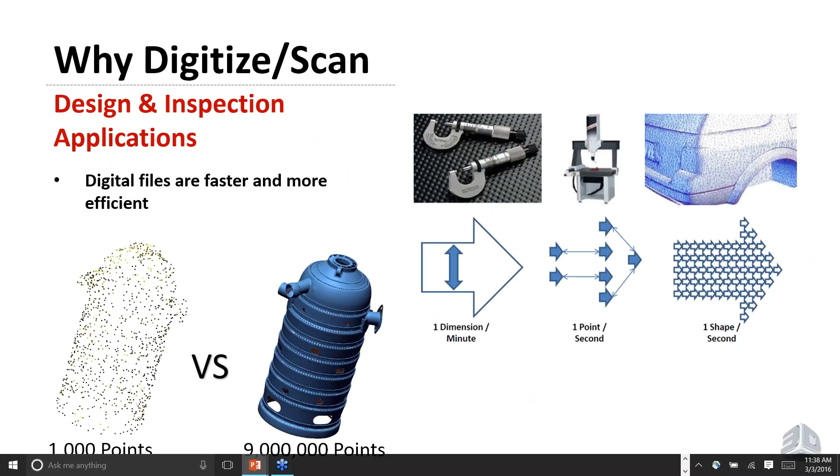Speaking about today is 3D scanning. So the big question is why do it? What makes it so great? The answer is pretty straightforward. Scanning is simply much faster and more efficient than traditional tools. You can collect millions of points of data within seconds for a better and more accurate representation of the 3D

geometry. Not only is it more efficient in collecting data, it makes the next step of converting or analyzing the data that much faster. Now that you have millions of points of information, you can bring that data into Design X or Control and create automated inspection reports or use feature wizards to tackle hard-to-create geometry.

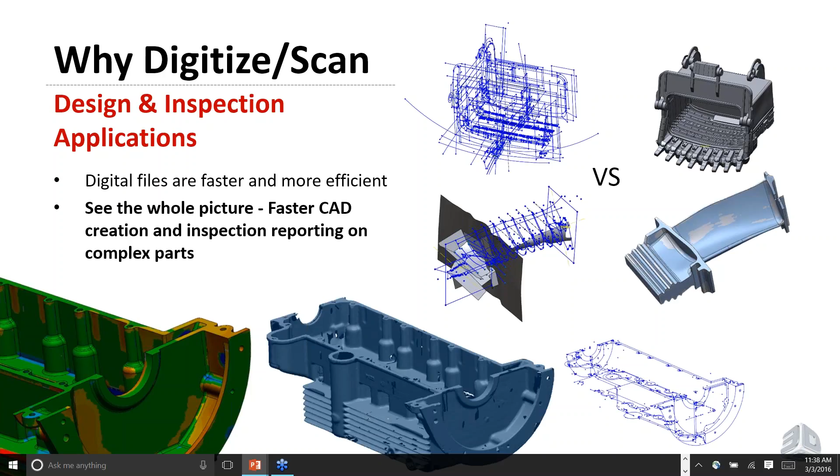Very similar to 3D printing, this technology really shines when dealing with complex design. An organic surface or an intricate detail on a part can easily be captured and recreated with scanner and software, where a set of calipers or CMM would struggle. And there are a lot of applications for improving or remanufacturing of a design that has no CAD files available.

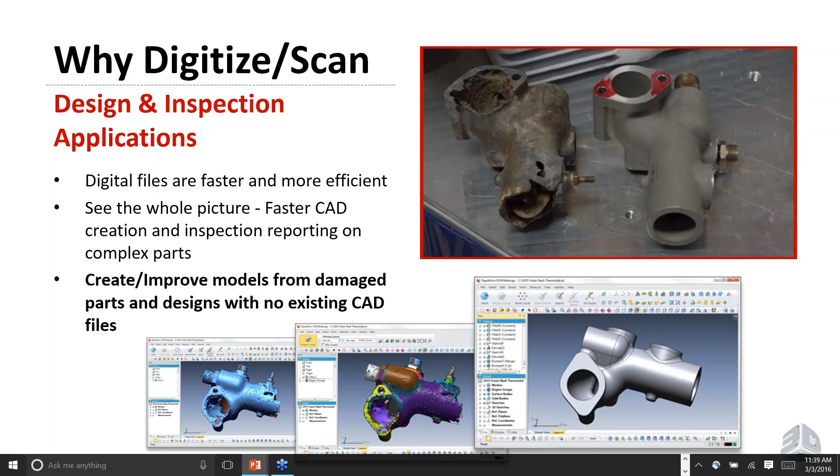This thermostat housing for one of Jay Leno's vintage cars that we did last year is a perfect example. He needed to replace and remanufacture this damaged part, but a 3D model just didn't exist. With 3D scanning, he was able to quickly digitize the part, allowing for quicker CAD recreation. And this is also great for his newer cars as well.

He scanned the body panel of his hand-built jet-powered car, the EcoJet, and used our software to design a vent that perfectly fits in the space. We printed out a working prototype. Because of the speed and accuracy of scanning and the strength of SLS 3D printing, he was able to have the parts ready within weeks compared to months. And this is the power of the digital thread.

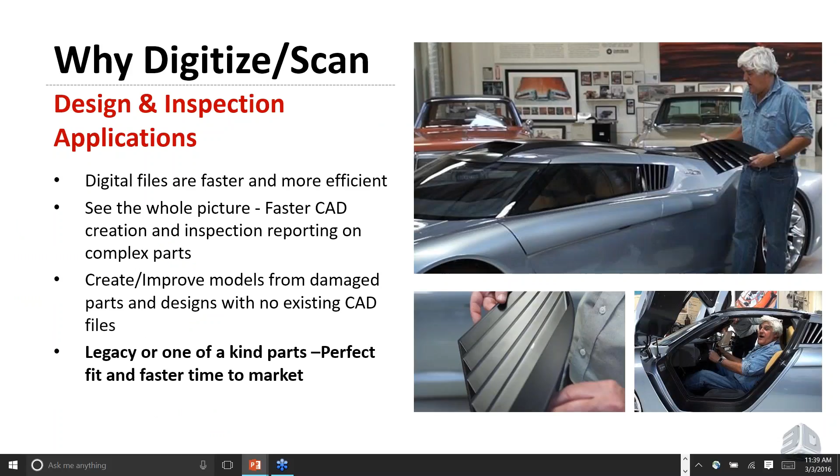So there are so many useful applications for scanning, whether it's a large-scale project that is too big and time-consuming to gather the data by hand, or an intricate detail or artistic design that is almost impossible to replicate. Imagine trying to measure a plant site or an airplane by hand.

Or maybe you want that perfect fit for a phone case, but don't have the dimensions or CAD files from the original manufacturer. You can quickly scan the phone to lock all of its dimensions and build a case that fits perfectly around the body. Scanning makes this all possible and provides the designer a more accurate approach and faster time to market.

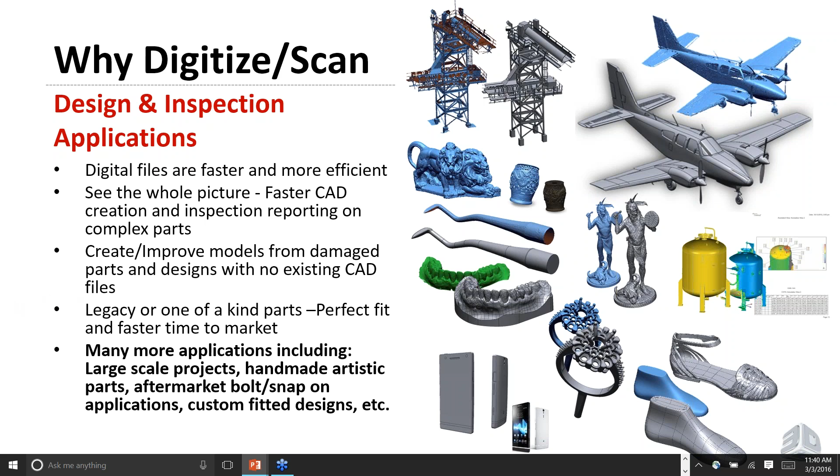So the scanners that we manufacture and sell are the Capture and the Capture Mini. There are a ton of different scanner technologies out there to choose from, and what's really great about the Capture is its accuracy and speed. It gathers roughly 1 million points per scan, and those scans are typically gathered in a couple of seconds.

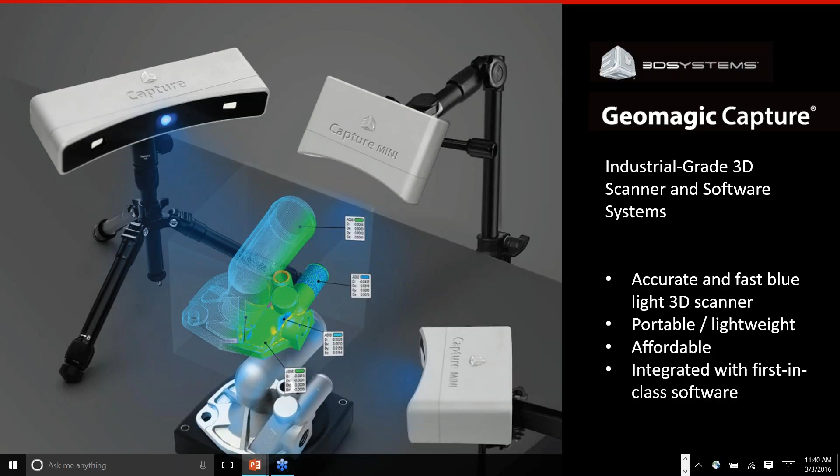It's portable and lightweight, so it makes it easy to carry around or have on your desktop, and it's affordable. It's one of the best scanners you can get on the market for the money. And it seamlessly integrates with all of our software packages. So that includes Design X, Control, and some of the other products like Freeform and Wrap.

So speaking of software, we're talking a lot about the scanning, but what do you do with the data once you capture it? There is a big misconception out there that you can go straight from a scan file to a CAD or CAM software, or that you can immediately print that 3D file, and that's not true. You'll need software to prep that data and interpret it. That is where Geomagic software excels. We're the industry leader when it comes to scan processing.

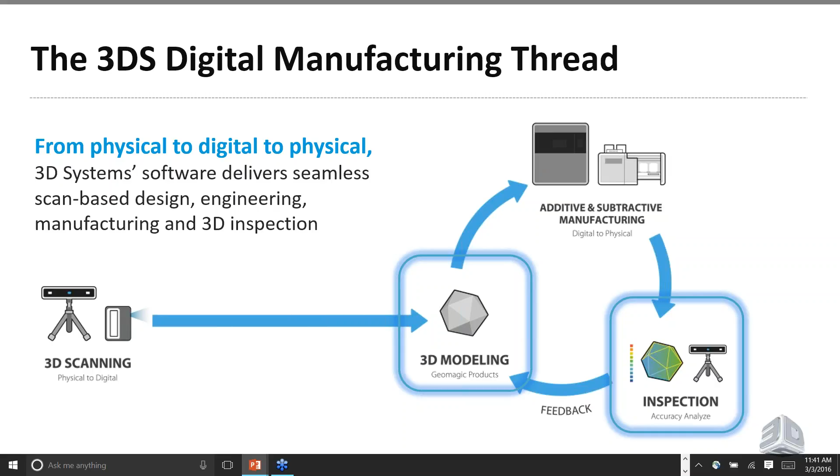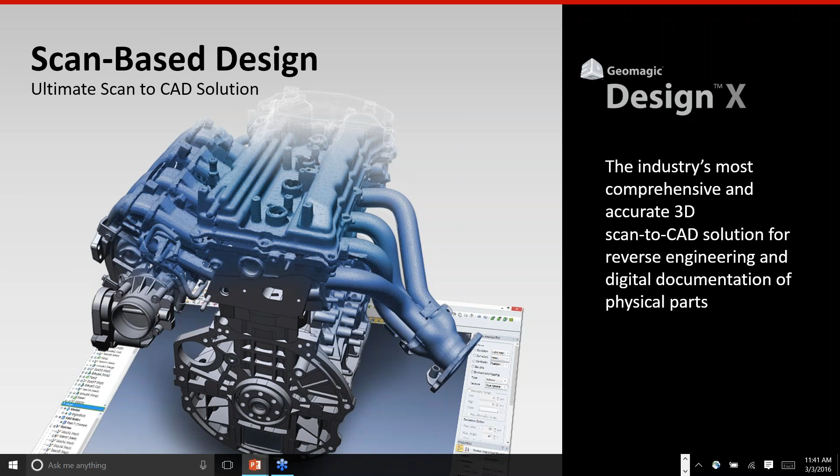The software leading that charge is Geomagic Design X. This is the ultimate scan-based design solution, and it bridges the gap between scanner technology and CAD/CAM software. What sets Design X apart from any other software solution out on the market, it's the fastest. There's no faster way of creating a CAD file from scan data available.

It can create native tree history models using its one-of-a-kind LiveTransfer feature, allowing for much faster design changes and faster time to market. And you can create neutral CAD formats that any CAD system can read. It integrates with our very own Capture, but also has plugins for direct scanning for all the major scanning OEMs, and works with any type of scan part. And that includes long-range scan data and something as small as jewelry design.

It also has best-in-class mesh editing tools with parametric CAD built in. So no more using 2 programs to prep the mesh and model. You can model right over the scan data, making the process more accurate and efficient. Automated surfacing tools to create CAD models from organic shapes are included, and easy to use for existing CAD designers because it has CAD built in. So it's a very intuitive workflow. And it works with incomplete or bad scan data. So things that are impossible, you can make possible.

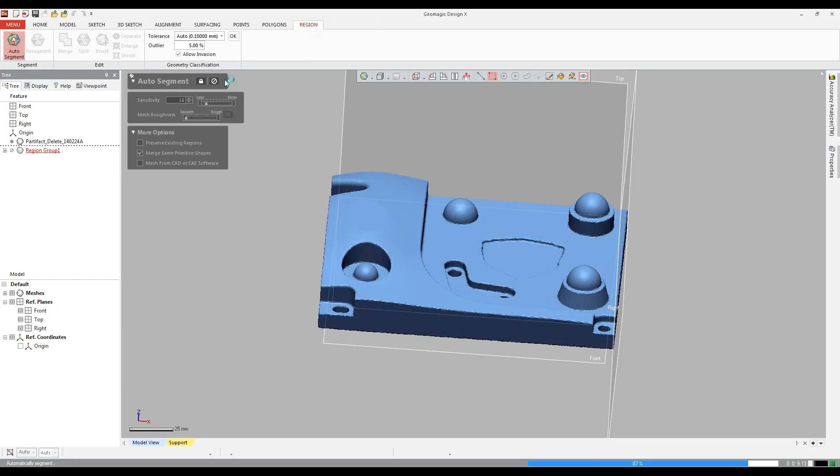The first thing I'm going to do when this model comes in is apply what we call region groups. If I build a model in design software from scratch, there's intelligence and perfection built into that design process. Of course, when I bring in scan data directly from the scanner, that information does not have that intelligence built into it. So our region groups analyzes the curvature in the scan data and breaks it apart into segments.

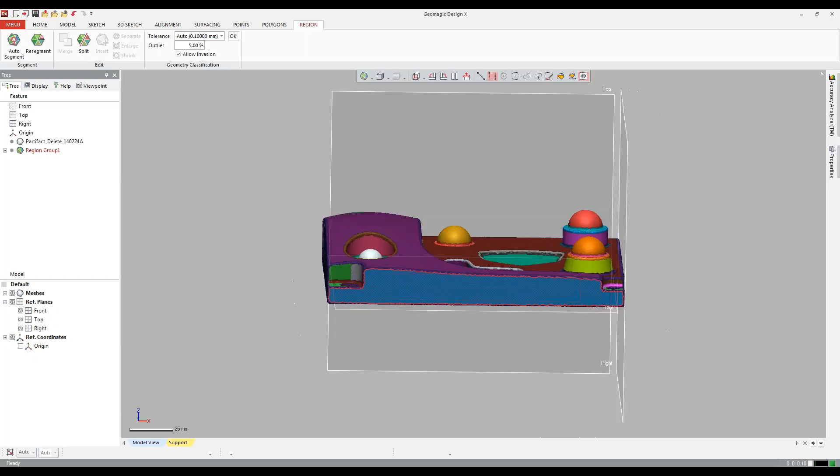We can use those region groups to help in the data alignment and reverse engineering process. Design X follows a workflow very similar to CAD software, so if you have CAD experience, it's easy to pick up. We create 2D sketches and extrude those sketches into 3D geometry.

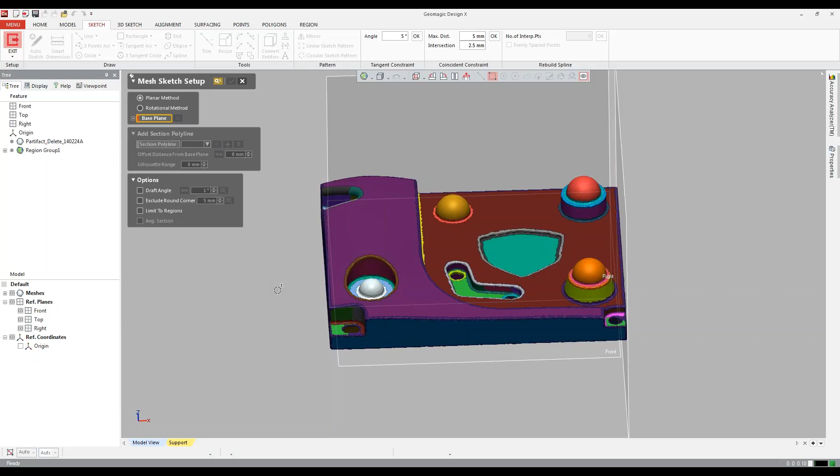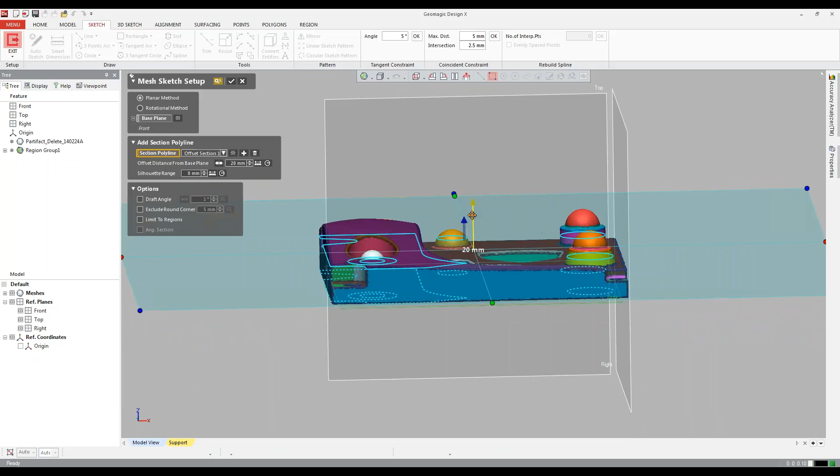So I'll create my 2D sketch, and I'll take a slice of the model. You can see the solid blue line here is the sectional slice I'm taking, and that dotted blue line is the projection of that slice onto my sketching plane. I'll move this slice into a region of the part that best represents the sketch I'm trying to create. So to start this part, I would draw a rectangle and extrude that into 3D geometry, then add smaller features. I'll move this sectional slice to a region of the part that gives me that rectangle.

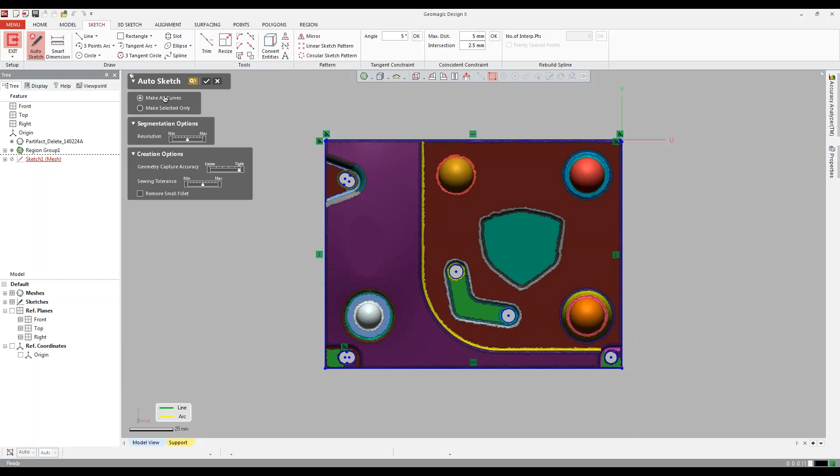Then to create my sketch, I'll use our auto sketching utility. This is going to find primarily lines and arcs inside of that cross-section I created and add sketch figures to them. Intelligence is built into that sketch so you can see there are horizontal, vertical constraints applied. Tangency is automatically applied. If I have a line approximately tangent to an arc, it will detect that and apply those intelligent constraints automatically.

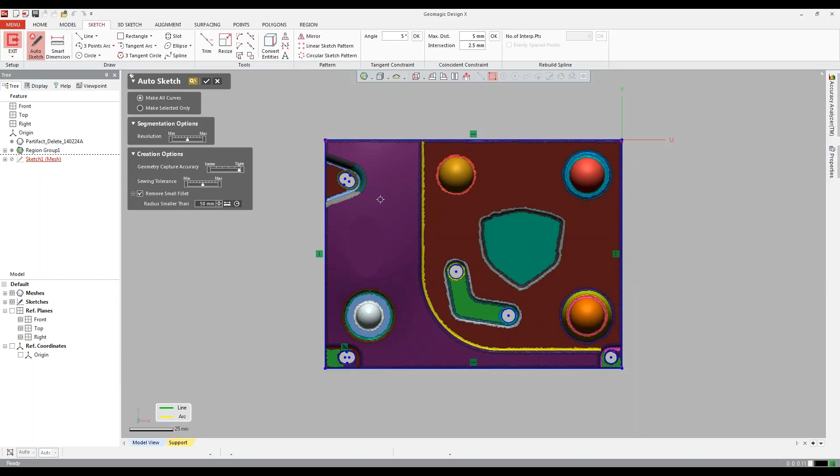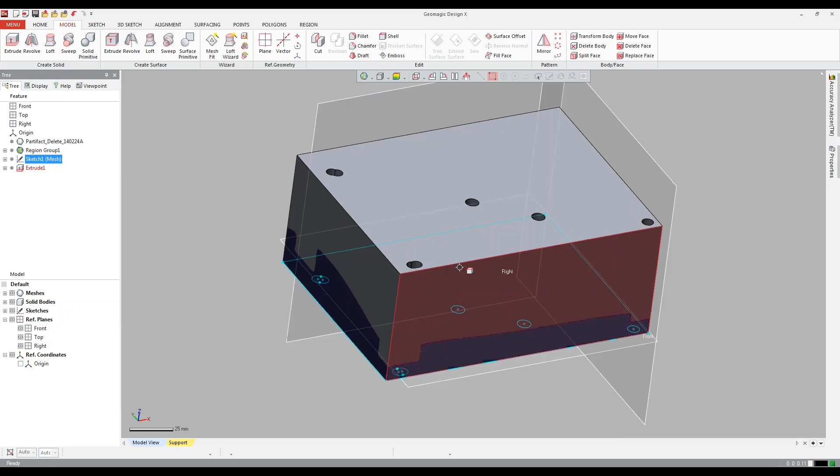Once my sketch is created, I'll extrude that into 3D geometry, just like I would in CAD. So this creates a solid body. This is the format of a model that I would send out for production. And to continue this process, we'll simply add more features using that scan data.

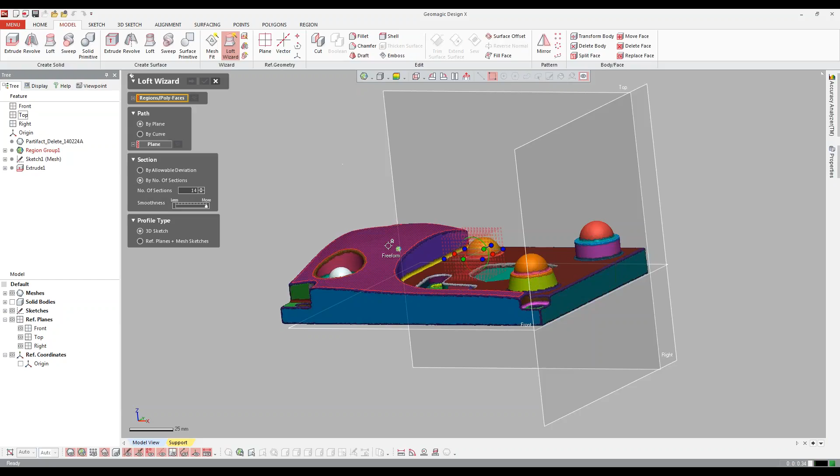So I'll hide that solid model that I generated, and I'll create a surface to represent this freeform face. If I were going to create a freeform face like this in most design software, I would do that by creating a bunch of sectional slices and then lofting those together. With this tool, I'm effectively doing the same thing, just going in the opposite direction. The geometry itself is already defined by the scan data, and I just need to recreate those sectional slices.

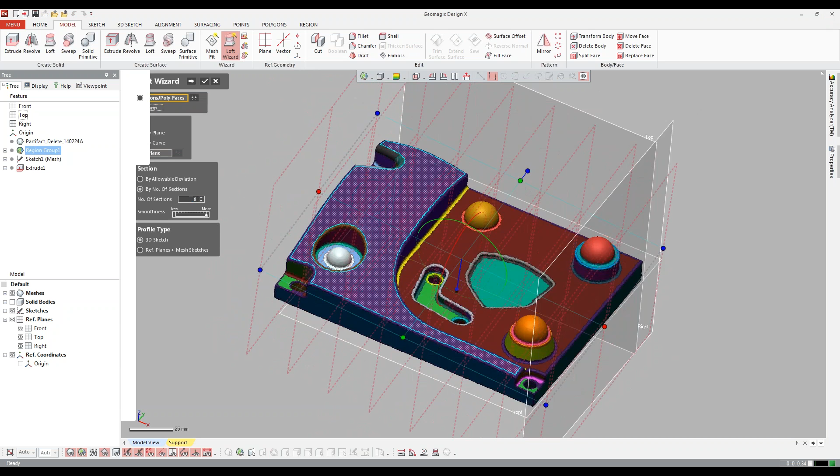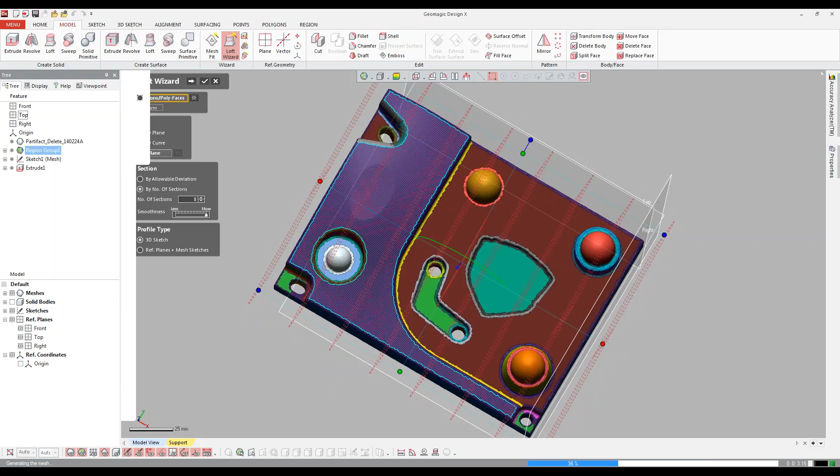So I can change the number of sections that I'm creating. These pink lines represent the sectional slices. Or I can tell it to use the least number of sections necessary to achieve a certain deviation to the scan data. When I go to the next step, a preview for that surface is shown, along with the sectional slices that will be used in the loft to generate this surface.

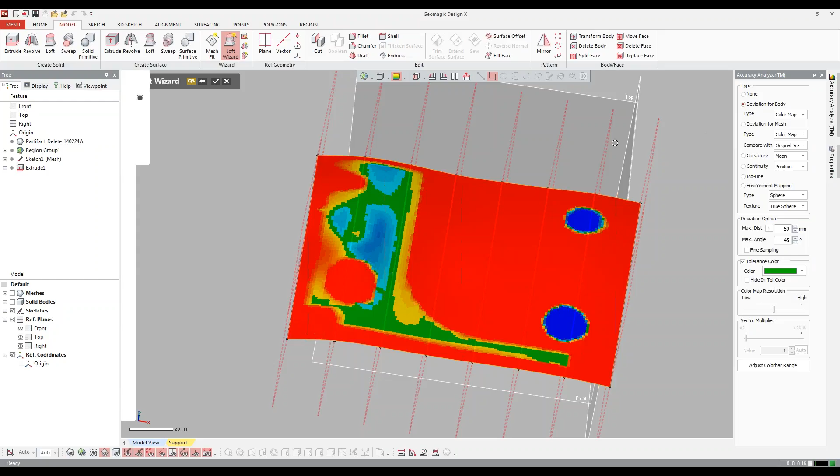Any features that I create in Design X, I can check the deviation for on the fly. So even before I confirm this feature, I can check to see that the feature actually fits the part. And of course, if I want to make any changes, I can add additional sections to areas of high curvature to get closer to the scan data.

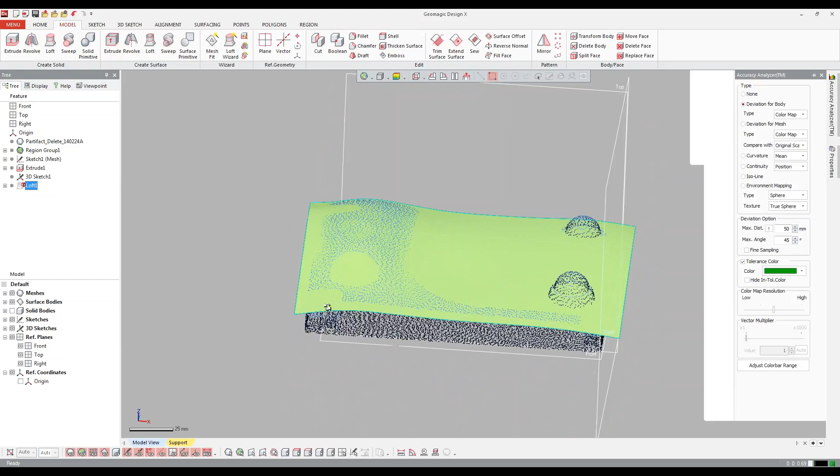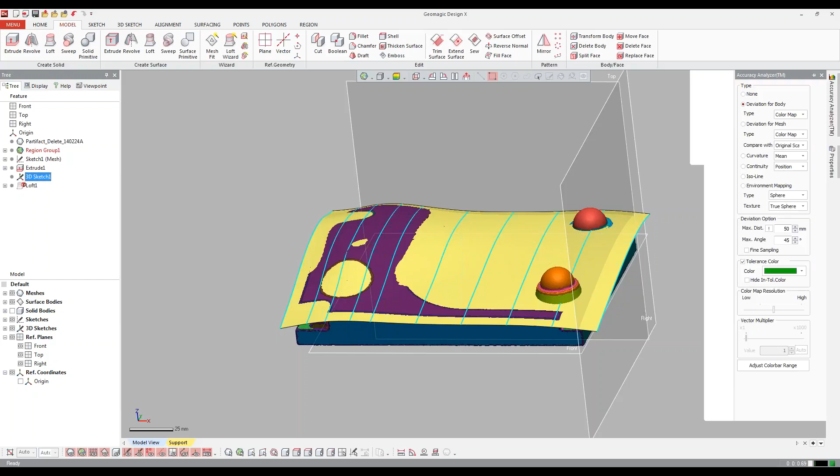When I say OK, a lofted surface is added to my design tree, along with those sectional slices. To create something like this from scratch using any other process outside of 3D scanning would take a very long time. I'd have to measure quite a few points to reconstruct the surface.

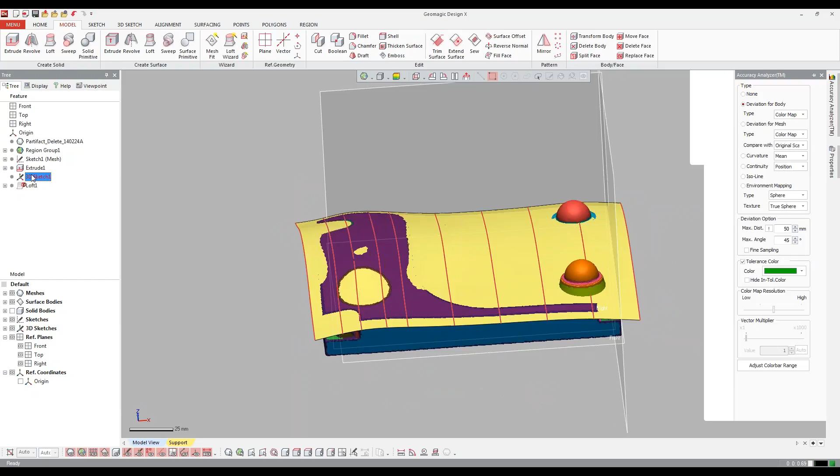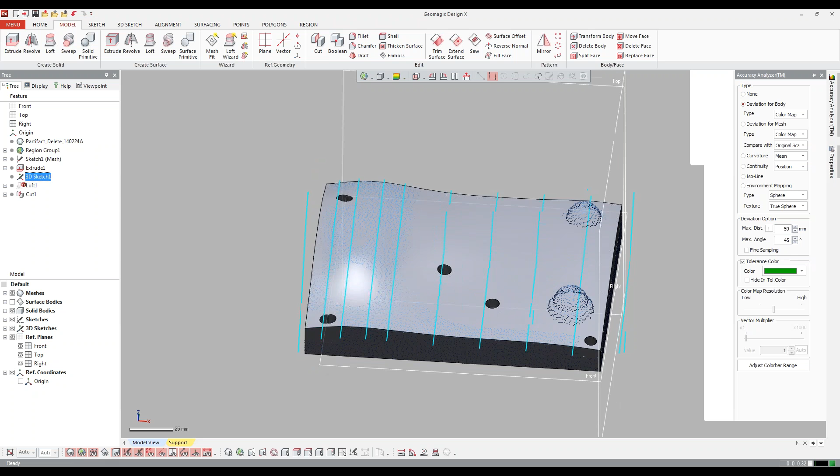But using the scanning process, I'm able to do that very quickly in a format that is parametric. Not only do I have a surface that fits the scan data, but it's history-based and tied to these sketches. If I need to make modifications, I can edit that sketch, adjust these control curves, and that surface will update automatically. So now I'll use that surface to cut the solid body I created earlier, giving it that same freeform curvature.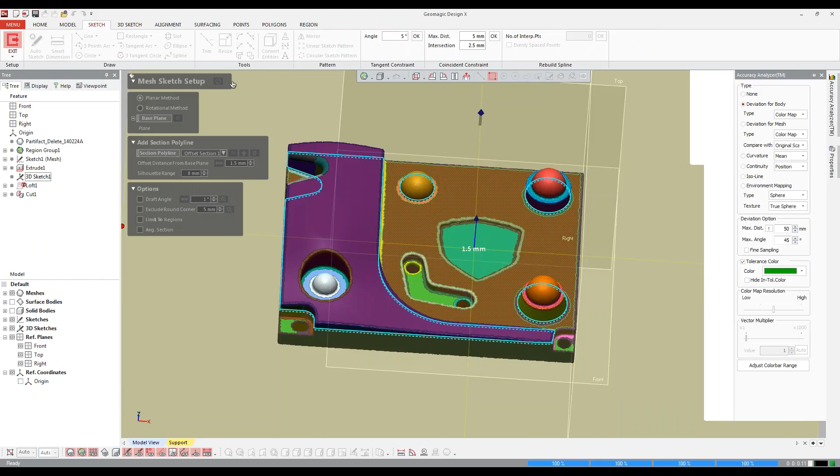I'll hide the solid body again. We'll do one more of those mesh sketches. This time I'll create this large inside cut. I'll move that sectional slice to an area that gives me a good representation of that wall, then auto sketch that wall. Since I'm creating this for CAD, if I want solid geometry, I need a closed sketch, so I'll add a few extra figures there.

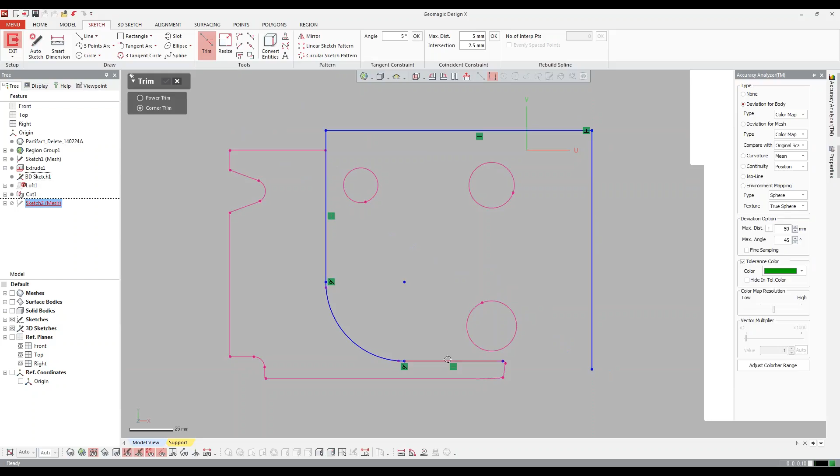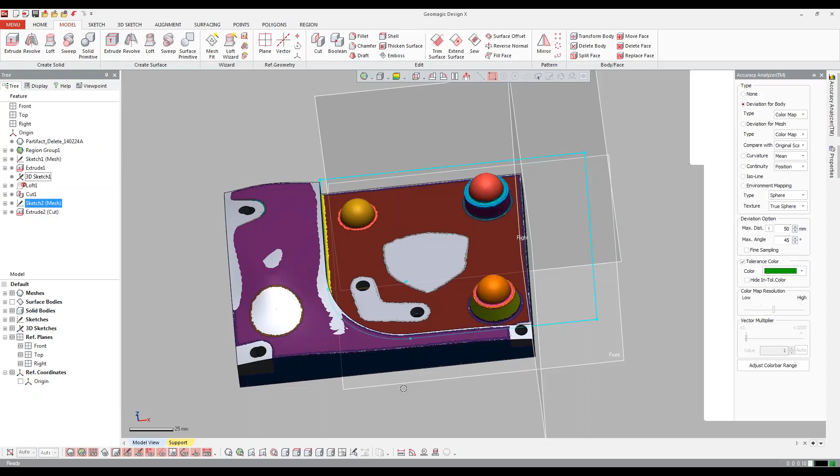Corner trim, and cut that away from my solid body. So that represents the manual process for creating features in Design X.

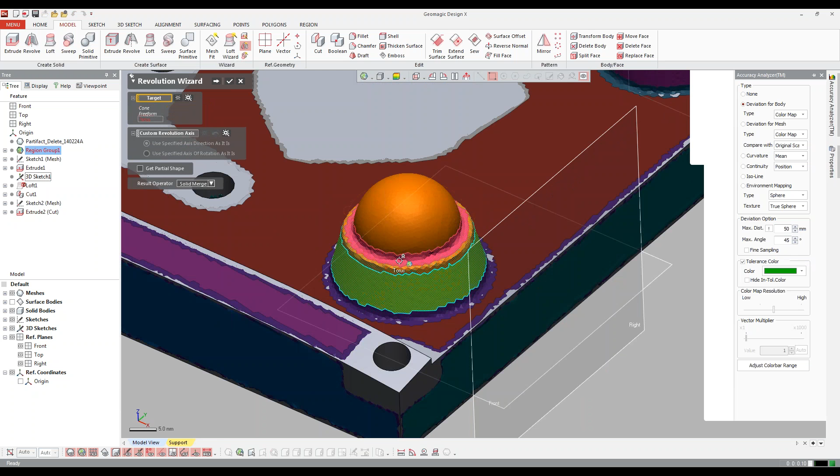But we have tools that automate that process even further. We call those our modeling wizards, and I'll start with some of these revolutions. To create these revolutions in CAD, I would need to create an axis of revolution, create a plane along that axis, then create a sketch on that plane and revolve it around that axis. Using these wizards, I simply select the scan data that represents the feature I'm trying to create.

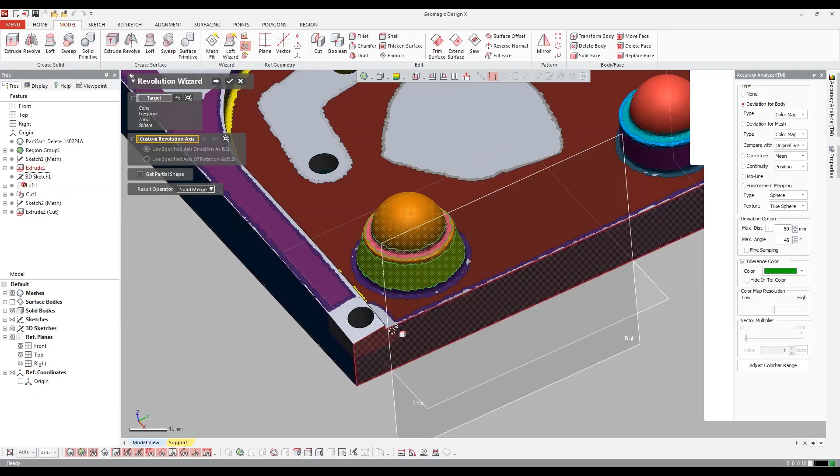Of course, scan data is never perfect, parts are never perfect, and what we're trying to accomplish is to get back to the original design intent for this part. So I can add user intelligence throughout this process to override the data available to me and add intelligent constraints. In this example, if I best fit an axis into this, I might find that it's slightly off angle, so I can tell it that I know the axis for that revolution is vertical.

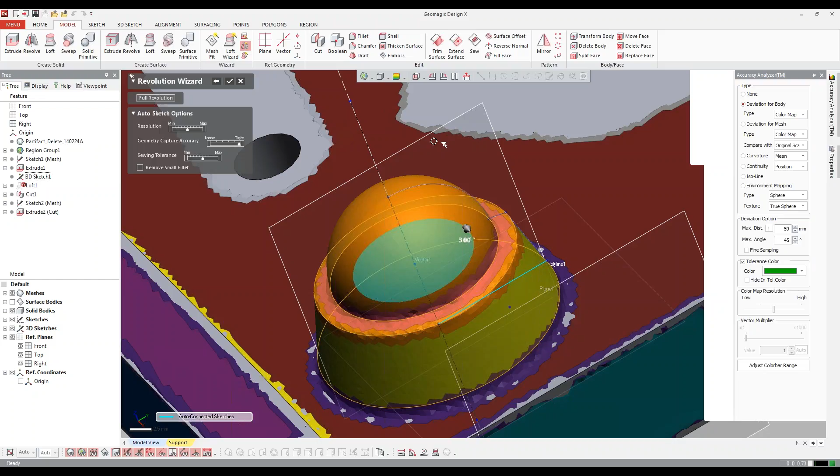When I go to the next step, you can see a handful of things just happened: that axis was fit in, the plane was created, the sketch was generated, and that sketch was revolved around that axis. So even though I was able to create this feature with a couple of clicks, it has the same attributes as a feature I would generate from scratch in CAD.

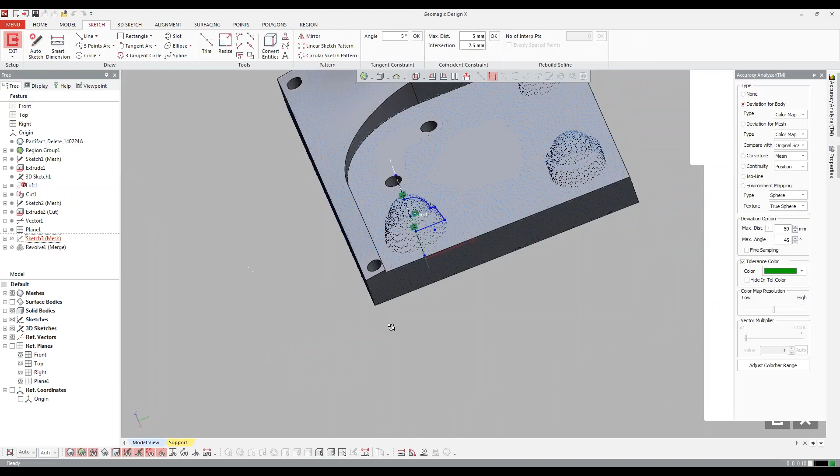So if I need to make modifications, I can simply edit that sketch, and when I leave the sketch, the model recomputes with those changes. Using that process, I'm able to very quickly generate history-based features.

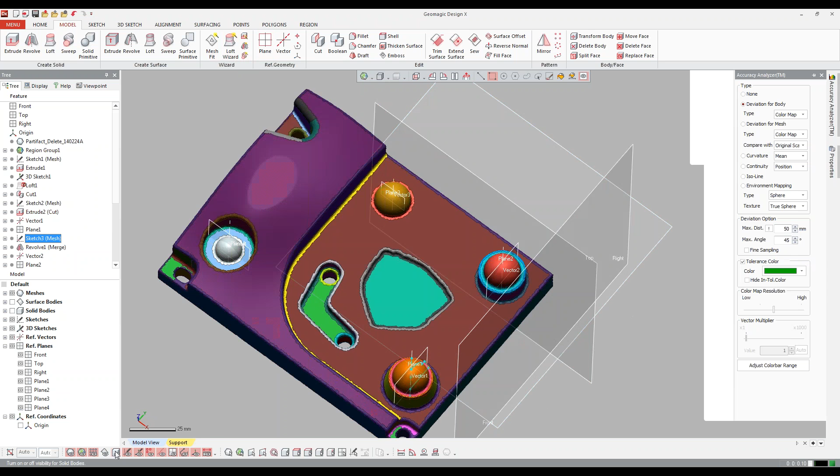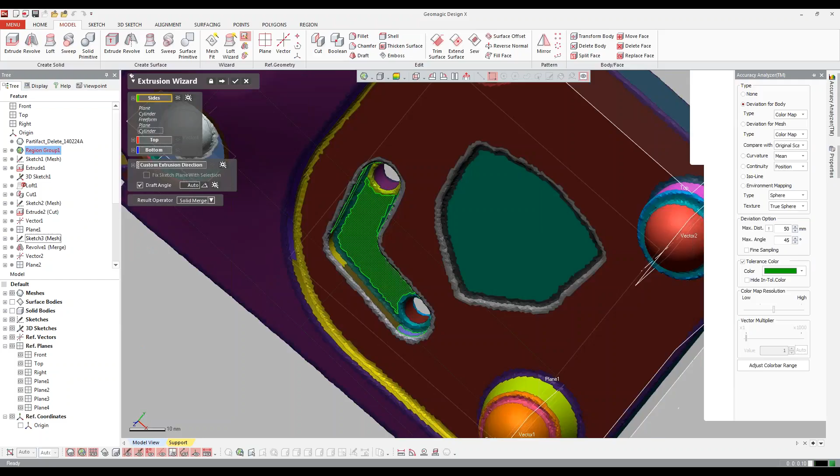I'll hide that scan data and show the solid body that I've built. We have that same tool for standard extrusions as well. So I select the sides of the extrusion, the bottom of the extrusion, and tell it that this is going to be a cut, and that feature is generated.

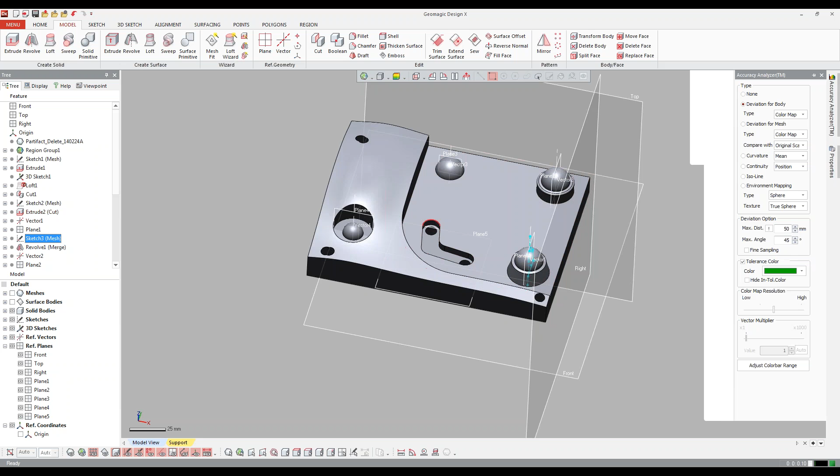So using these wizards, I'm able to create a part that would take 20 to 30 minutes to design from scratch in CAD, and build that same part with the same CAD intelligence in a matter of minutes.

Once this process is complete, I can transfer this model over to my CAD software using a process we call LiveTransfer. What LiveTransfer does is use the CAD software's API to rebuild all of the intelligence we've built around this part directly inside the CAD software. So all of my reference geometry, my planes and axes, all of my sketches, all of my constraints, all of that transfers directly into the CAD software. To demonstrate that, I'll use SolidWorks.

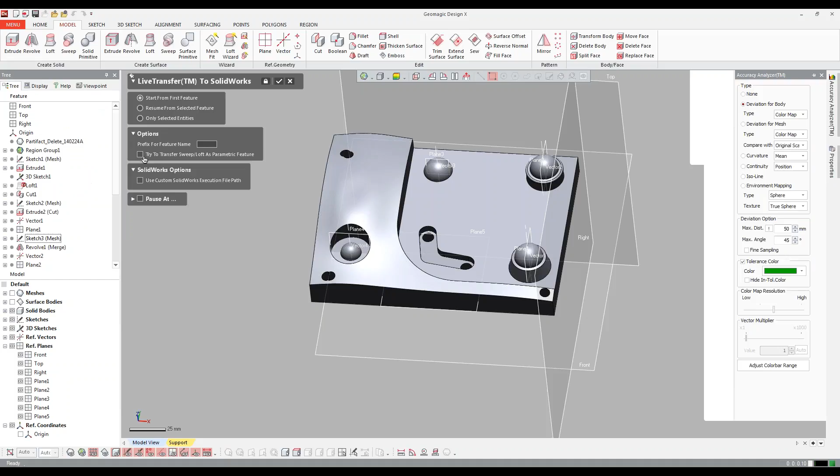There's a couple advantages to this process. One, the more obvious advantage is the one I just mentioned: this entire design history is rebuilt directly inside my CAD software, so if changes need to be made downstream, it's very easy to do so.

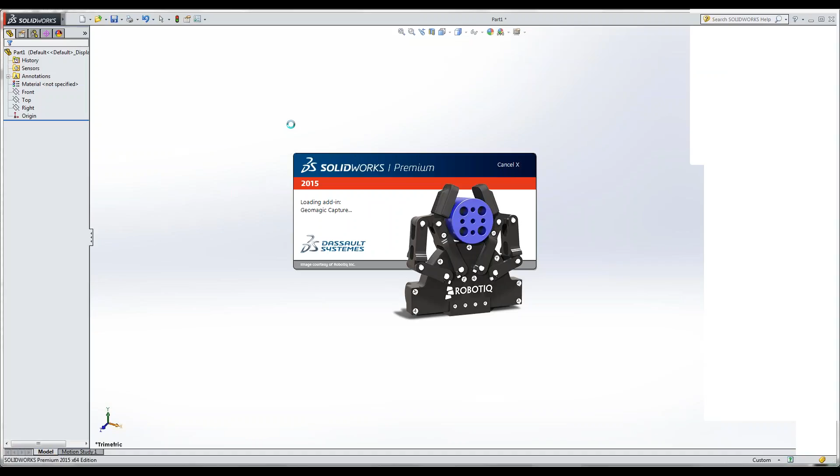I can edit those sketches and recompute those features just as if I had created that model from scratch inside my CAD software. The other advantage is that we are circumventing any file translation in this process. The common CAD formats used to transfer solid models between CAD systems are notorious for having problems.

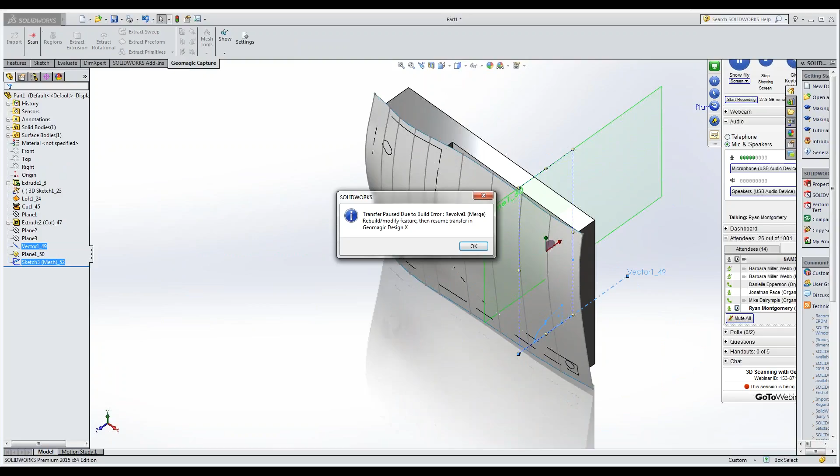And we're able to get around those CAD formats by rebuilding the model directly inside the CAD software. If I do have problems, it's tied to an individual feature. So we can see here we have an error. When that occurs, it pauses the LiveTransfer process in Design X, so I can go back and edit these features, and then resume that LiveTransfer process where I left off.

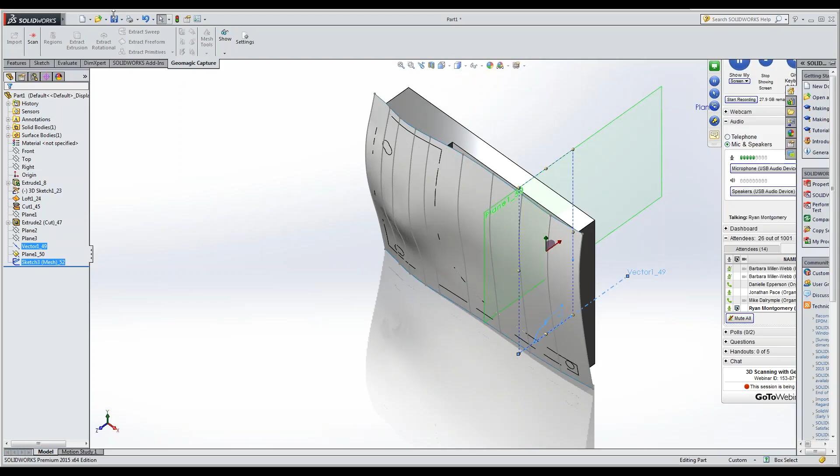Once I'm done, I simply hit Save in my CAD software, and I can save this file as a native part.

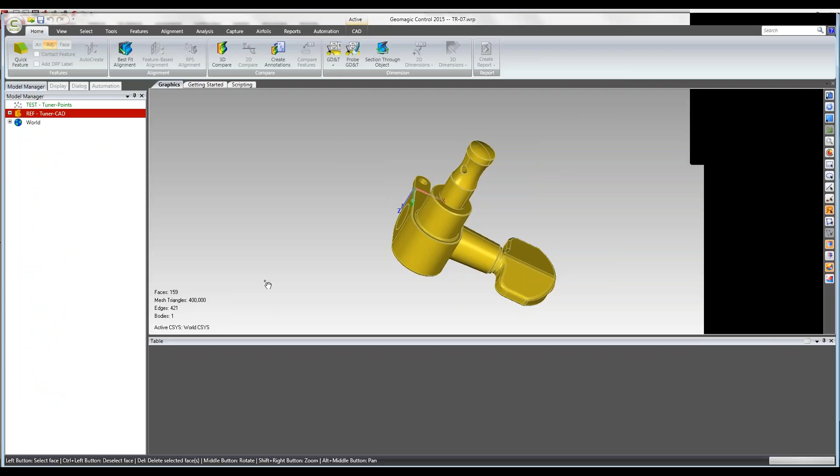So that's Geomagic Design X, our reverse engineering solution. Now I will show Geomagic Control, which is our inspection software. In Geomagic Control, we take scan data and compare it to the original CAD file that goes along with that particular part.

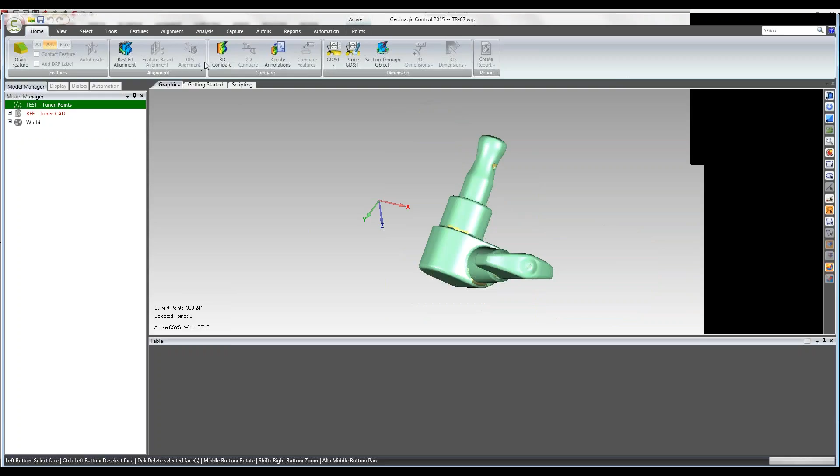So I have the CAD file imported here, I have the scan data imported here, and the first step is to align those together in the same position. We have a number of different ways that we can do that. The easiest is our best fit alignment.

That just looks at the geometry between the two components and tries to balance out the deviation across the part. So as soon as this process completes, you'll see the scan data jumps to the same position as the CAD model.

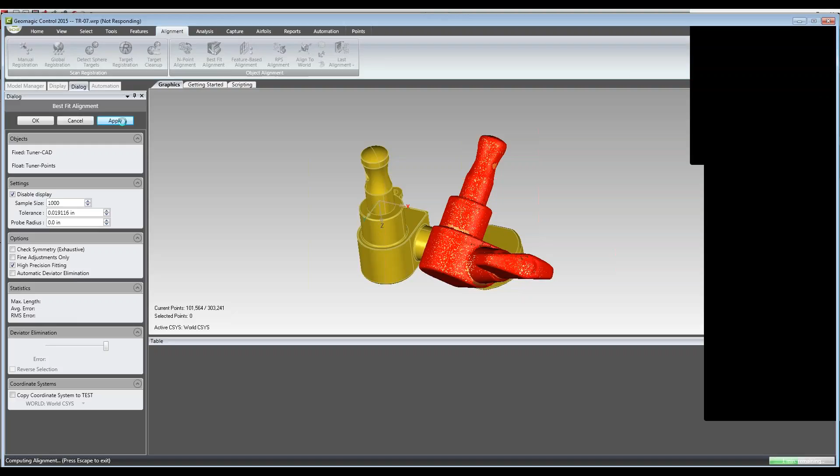Of course, we can also generate features on this model for datum alignment. Once that scan data is in position, typically the first thing we'll do in this process is a 3D comparison between the two.

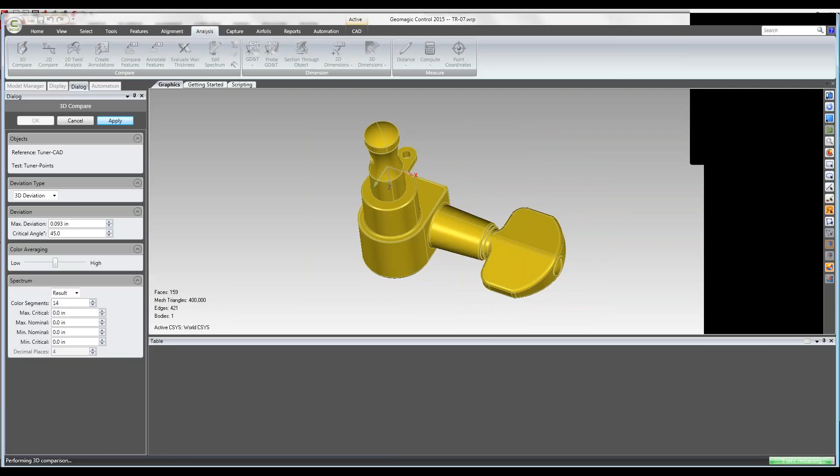This shows the deviation between the manufactured part and the original design intent.

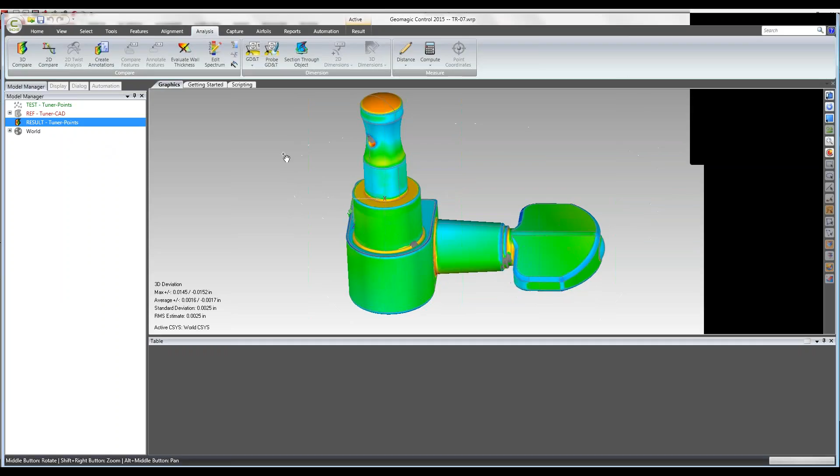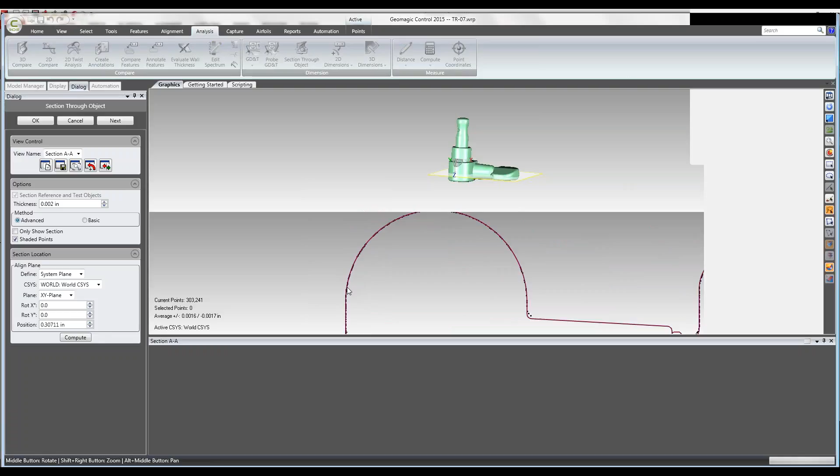Of course, we can take measurements as well, so I'll create a 2D section here. In my 2D section, you can see that this purple line represents the CAD data. Those black dots represent the scan data.

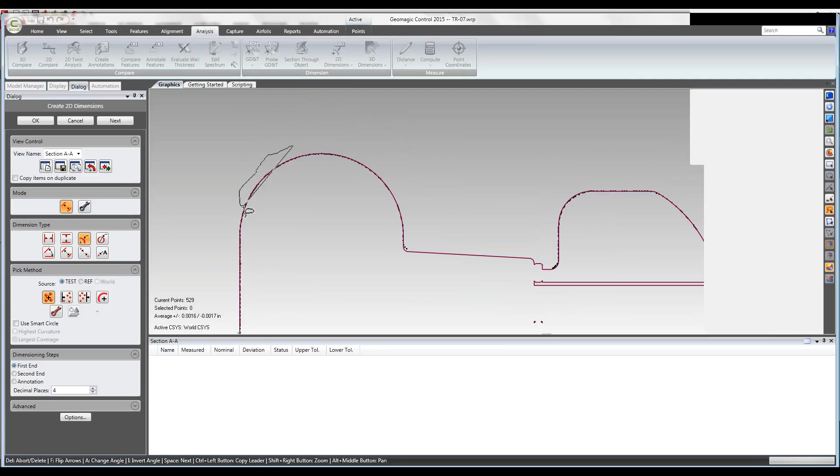So I can apply dimensions by selecting the type of dimension that I want to create, and then selecting the data that's associated with that dimension. So we'll do a radius dimension, for example. Then I'll lasso select the scan data that I'm measuring, and then click to place that dimension.

We can change how those dimensions are measured. Right now I have it set to best fit primitive figures into the scan data, but we can also tell the software to find the outermost point, as if I'm using calipers, to measure the innermost point, or to measure off the center of an arc.

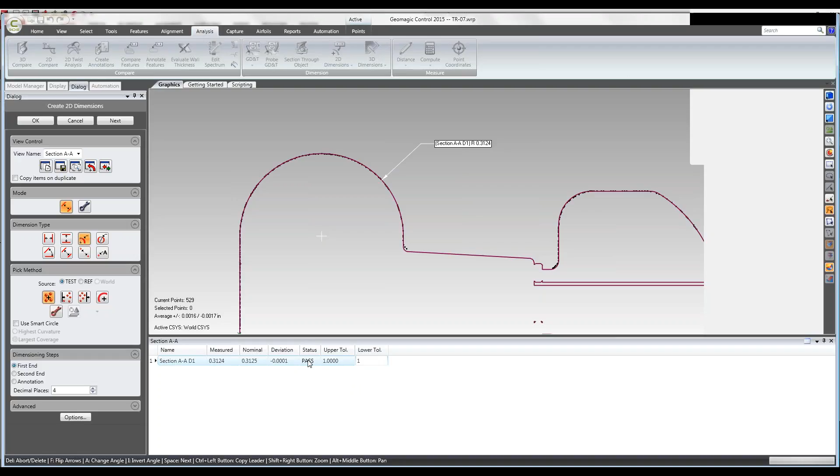And every dimension that I create here has a tolerance applied to it that I specify, and a pass-fail based off of that tolerance.

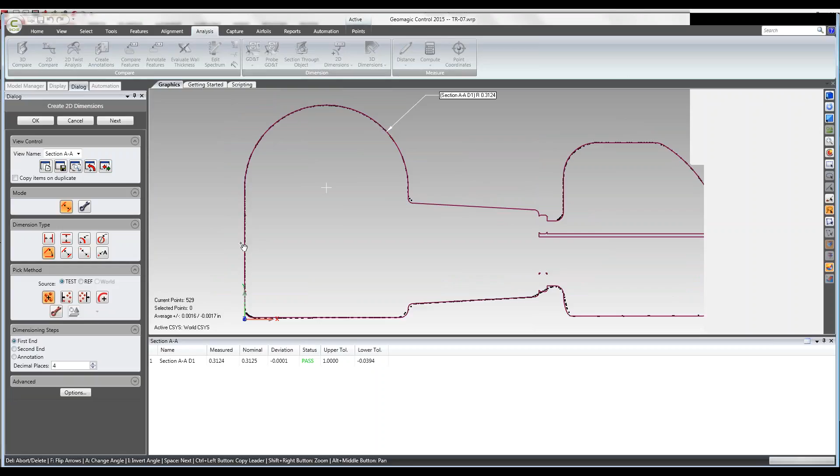I'll do one more dimension here. This time I'll do an angle dimension, and I'll select two figures that I want to measure and place that dimension.

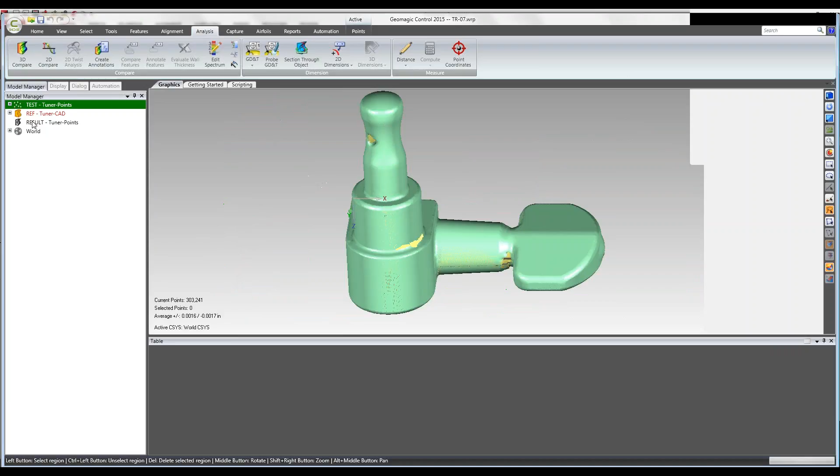We can check GD&T by placing that GD&T on the CAD model. So for example, I'll check the flatness of this face. And then we can evaluate that GD&T call out off of the scan.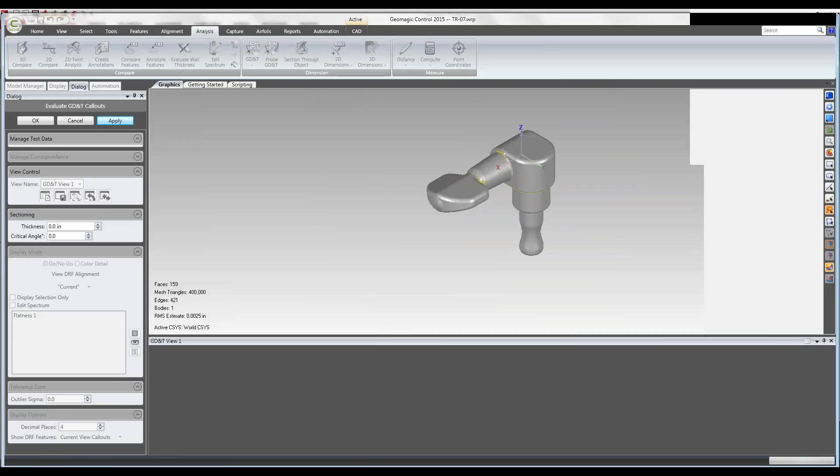One of the biggest advantages to Geomagic Control over some of its competitors in the market is that it's very much geared towards automation. So if I have multiple copies of this part,

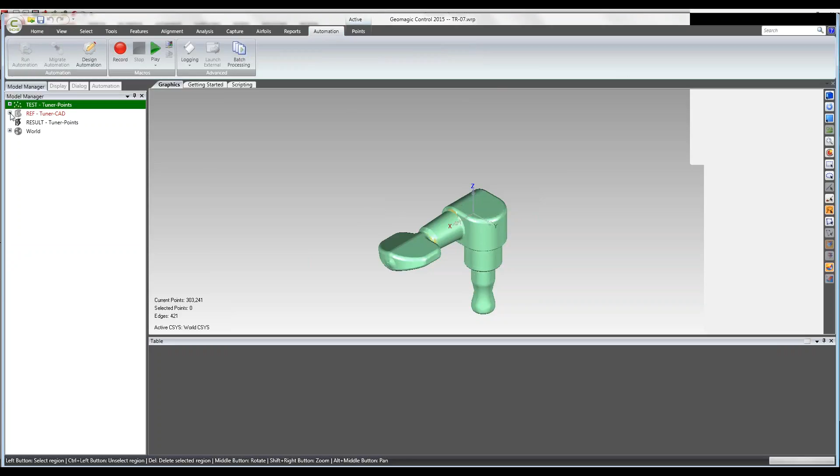I don't have to go through this process every time I scan the part. Geomagic Control just assumes, as I go through and take these measurements, that I intend to do this again on another instance of this part. So an automation module is recorded that stores the entire history of the process that I've used.

So you can see we started with the best fit, we created a 3D compare, we took our measurements, did our GD&T, and then we evaluated those results.

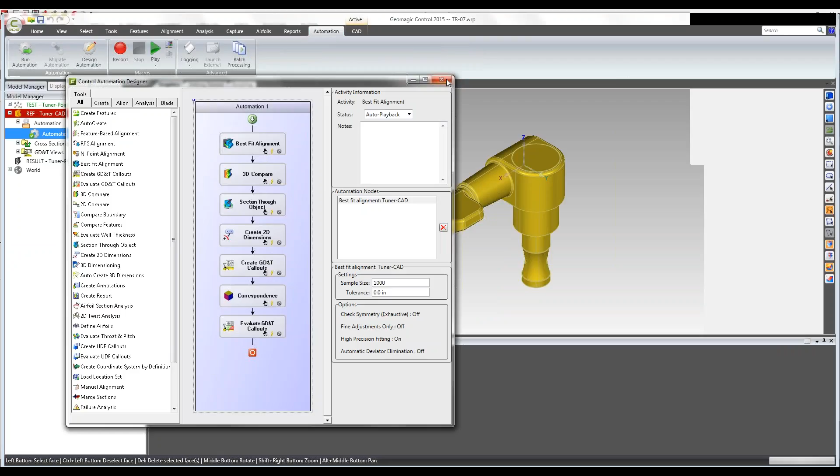So if I have multiple instances of this part that I need to check, I can scan each one of those components, put all of those scans into a folder on my computer. Then I can come into this batch processing utility, and I can tell it to rerun this process that I just applied on this particular part on every instance of those scans inside of that folder.

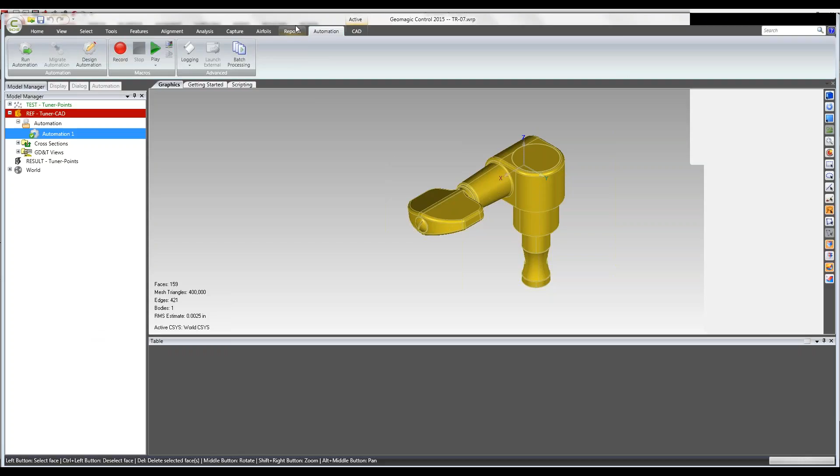Once it's done, I can go into my output directory, and what I'll find is a report for each one of the scans that I had there.

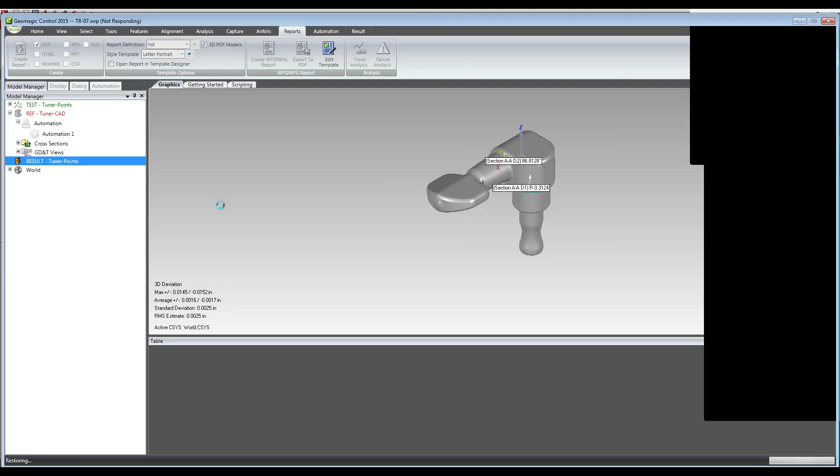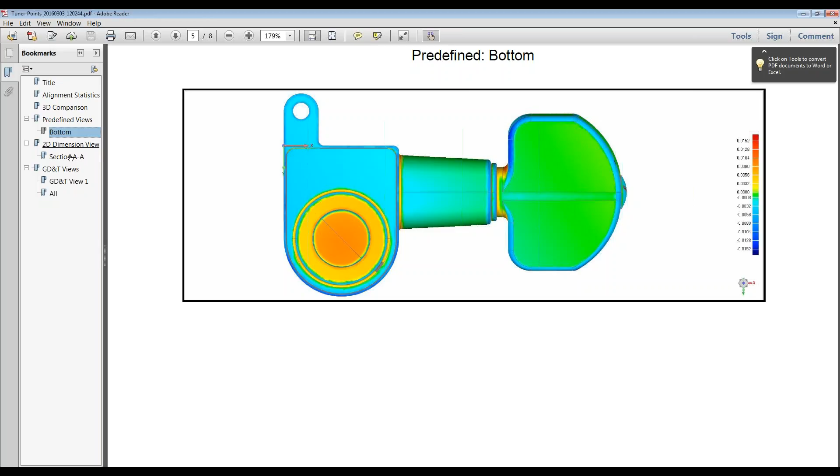By default, the report includes everything that I've checked on the part. So it shows me my alignment statistics, it shows me my 3D comparison, and all the statistics that apply to that comparison. It shows me all the measurements that I've taken and whether those measurements passed or failed within tolerance.

Same thing with the GD&T, but of course this can be highly customized, so I can set up this report to exclude any information or include any information, and I can change all the visual elements of the report as well. So if I want to put a company logo on there, I can do that.

Geomagic Control also has a really powerful scripting module that's built in directly to the software that allows me to create intelligent processes that expand much further than our standard automation. So if I find that I'm doing a lot of data processing each time I take a scan, I can record that process in Geomagic Control, and when I do my automation, I can tell it to run any of these scripts in that process. So it makes automating the whole process for inspection very quick and easy.

Now I'll pass this over to Danielle to finish the presentation. Hey, Ryan, pass it over to Barb instead. To Barb. And then while he's doing that, it looks like we have a question so far.

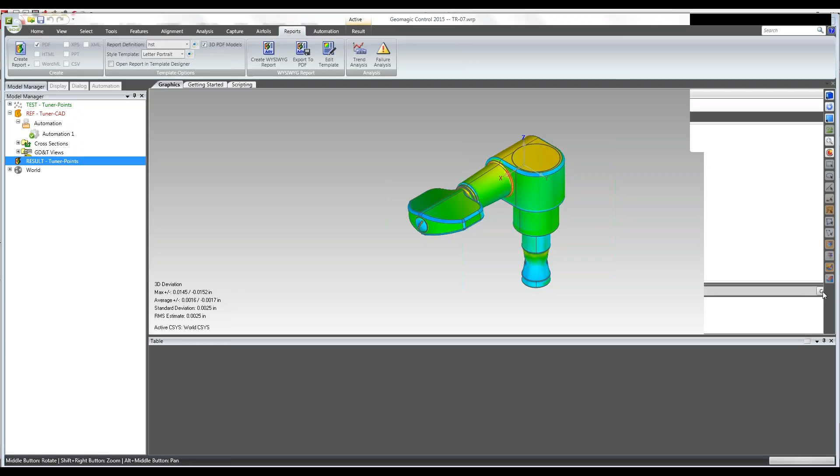And the question is, maybe Ryan, you can help us answer this. Have we ever used this for tubes and getting coordinates on them? I think this was asked during the Design X portion of it. For getting coordinates, we can extract points in Design X, but Control is really more geared for that. So Design X is when we get into reverse engineering. We want to build a CAD model off of the scan data, and Control is what we use for taking measurements. And there is some degree of overlap between the two softwares.

For example, both softwares have a full array of point cloud editing and mesh editing tools built into them. But when we're doing analysis on the scan data, we typically do that in Control because that's what the tool set is geared for. And when we're doing reverse engineering, we do that on the Design X side.

Okay, thanks, Ryan. I got another question that was sent to me. What is the pricing for Design X and Control? I'll go ahead and answer that now. The pricing for Design X is $19,950, and that includes the first year of maintenance, which gives you access to technical support and version upgrades. And Control is $15,900, and that also includes the first year of maintenance.

And it looks like there's one last question. What are the system requirements? So I'll also answer that one as well. You'll need a CPU with a speed of 2 gigahertz or higher, and then you'll need a minimum of 4 gigabytes of RAM. We generally recommend having 8 gigabytes of RAM. 16 gigabytes and more work best. You also need a dedicated graphics card with at least 512 megabytes of RAM, though we recommend at least 2 gigabytes of RAM on your graphics card for best performance.